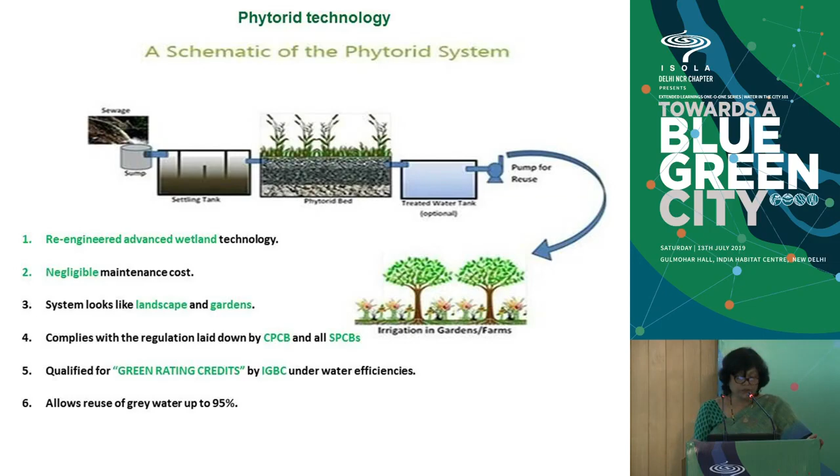Nowadays we are also introducing adsorption beds. After this we have sand and activated carbon to meet the new norms that are coming in place with this NGT order. So it has a negligible maintenance cost, and it looks like a landscape and garden, and complies with the regulations laid by the Pollution Control Board, and qualifies for green rating credits by IGBC under water efficiencies, and allows use of grey water up to 95%.

Application areas can be small colonies, even apartments, townships that are coming up, hotels, municipal schools, municipal councils, education institutes, schools, colleges, railway stations, and public toilets.

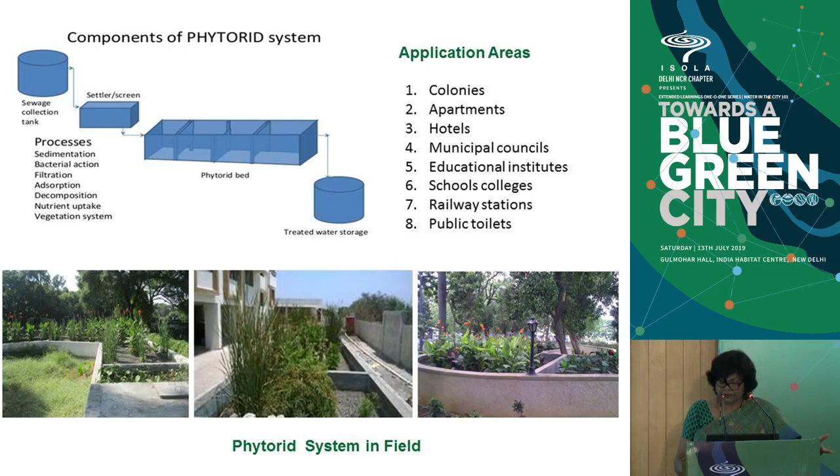The contaminant removal mechanism in phytorid is the biochemical oxidation of organics, which is reduced, nitrification and denitrification, and the phosphate uptake, which is taking place by the plants itself. And the anaerobic treatment zones are at the bottom.

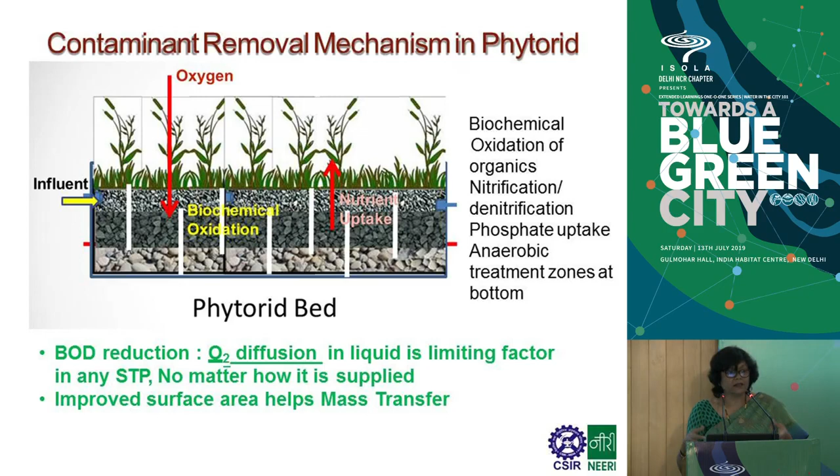So in any STP, the BOD is the measure of organics in the wastewater which are biodegradable, and this is the parameter which is of prime importance while you're designing, or even in the treated effluent you have to measure this, and this is the parameter which I was saying is now less than 10 as per the NGT order. So BOD reduction is because of the oxygen diffusion in liquid, and that is the limiting factor in any STP, and that is what controls the mechanism of removal of BOD.

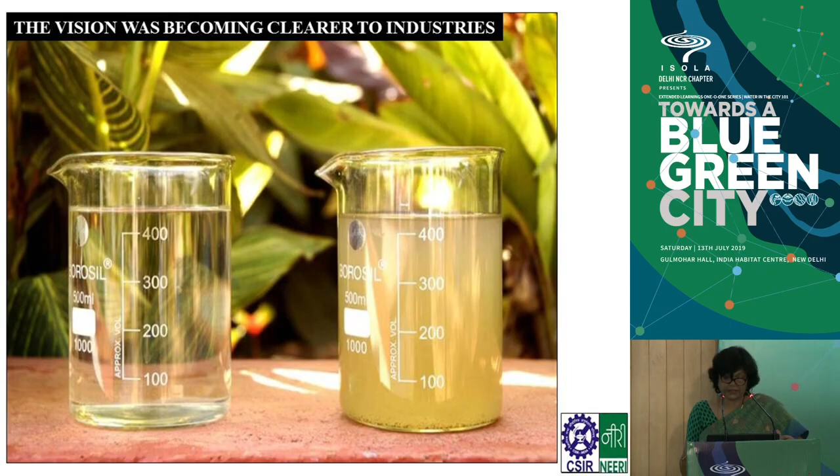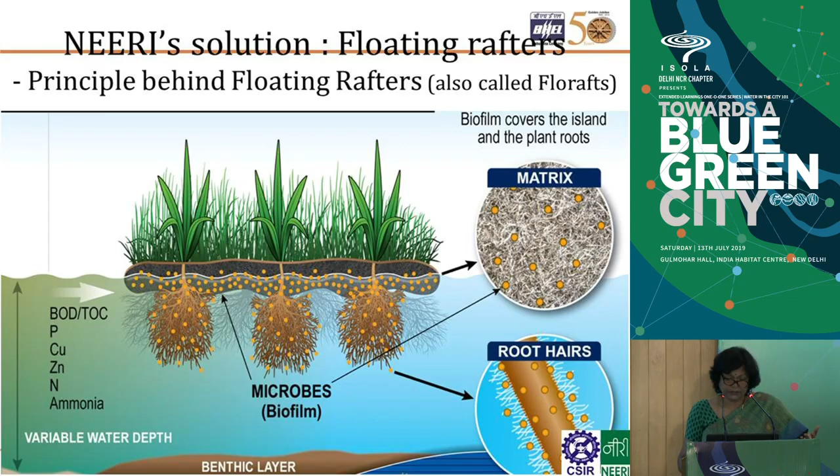We come to enhanced in situ drain treatment, which we were talking about. Ma'am has just shown you what is the problem when you have the drains and it is not monitored, and it is a no man's land actually, and the slums and the dhobi ghats and everyone just thinks that it is a place where you can dump your solid waste or liquid waste, or even the cow dung, or anything. We have experienced all kinds of things, and so we were very fortunate that we were given a project in Prayagraj where we have installed this in 6 drains.

And it all started in NEERI with a dream of our director, Dr. Rakesh Kumar, who wanted to see this drain which was running inside NEERI to be treated, and then if we could use the treated water for the plants inside our NEERI. So it was a pilot plant which was run successfully, and we named it Restoration of Nala with Ecological Units, and its name is RENEW. So I will not talk about the background and need for treatment. Ma'am has already talked about it.

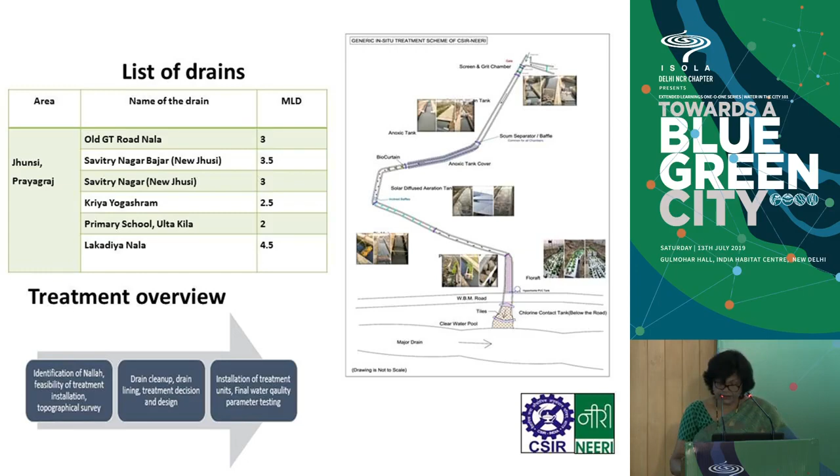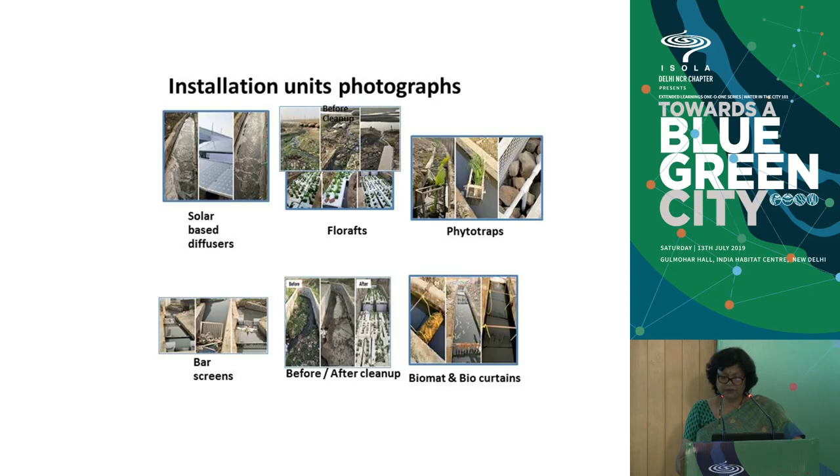So these are some of the pictures, and I forgot to say there is an aeration unit also, and it's absolutely natural because it is going to run on the solar panels. And there are florafts that are using the same plants that we are using in the phytorid also. And then we have the bar screens you can see down on the extreme left. And you can see the picture of before and after cleanup, how beautiful it looks.

So in this we promise about 60% reduction in BOD. We are not promising 10 BOD here. We are saying that if we do the treatments of this, because we can't predict what will come in the drain, there is no equalization, and sometimes suddenly there is a shock load because some dhobi has done something, or some cattle people have thrown their dung into this. So we promise about 50 to 60% reduction in BOD, and definitely in suspended solids, we are saying that we will get about 90% removal of the suspended solids.

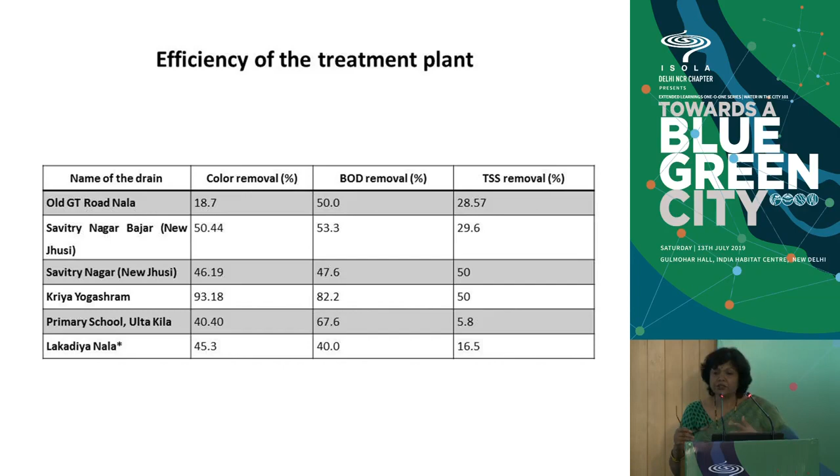So this is the project which I have now. It is a DST sponsored Pani Water project. I just wanted to put it over here because apart from the contaminants which we talk about, there are contaminants which are not visible, and which are not being regulated. These are the contaminants of emerging concern. They are called CECs. And what are they? They are antibiotics, pharmaceuticals, personal care products, endocrine disruptors, steroids, hormones. The effects on health of all these contaminants are not known, but they can give you antibiotic resistance in the body, which is why people don't react to the antibiotic doses which they were reacting to previously. We require higher doses. It gives more opportunity for the drug industries to have more business now.

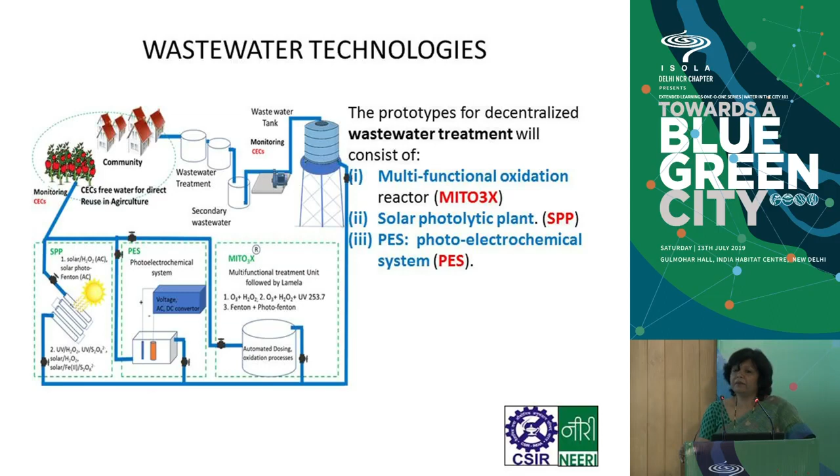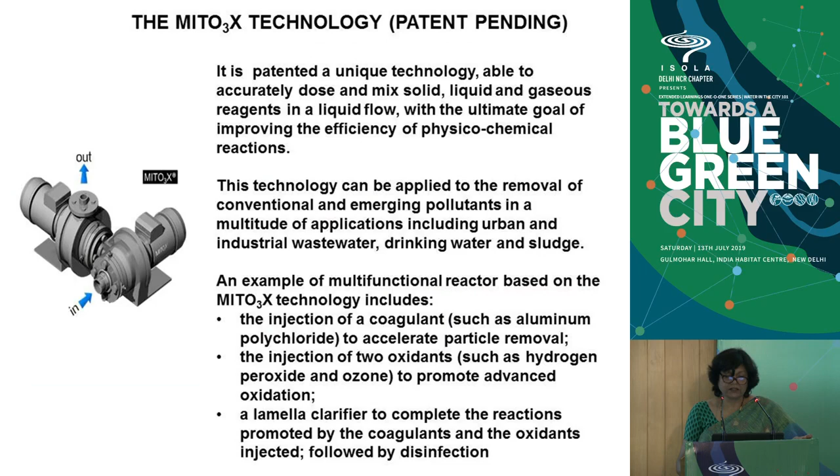And as you can see, we have this association with Aquasoil Italy and also Spain and many countries. In this association, we are co-creating a technology called MITO3X. And we are looking for a demonstration site. It will be 100 cubic meters per day, and the land that we require will be about 10 by 10 meters. That's it. So if anyone is interested, please contact me. It is an integrated decentralized treatment which will consist of coagulation, sedimentation, ozonation, and hydrogen peroxide. The treated water we promise will be fit for agricultural reuse, it will be very low maintenance and low electricity consumption, and it will also have reduced sludge volume. So drinking water technologies I'll not talk about, and this is what the demo plant will look like.